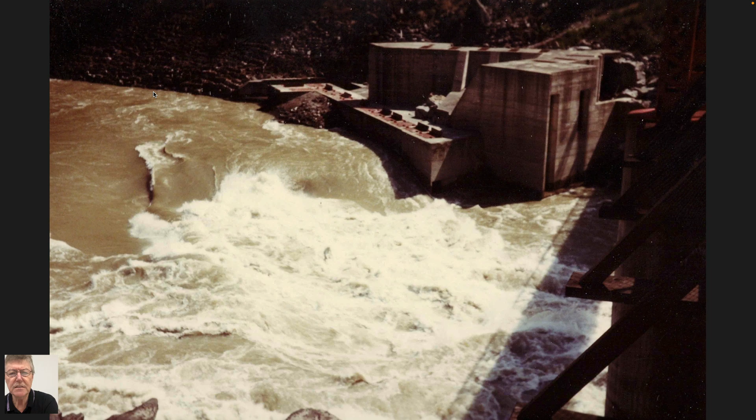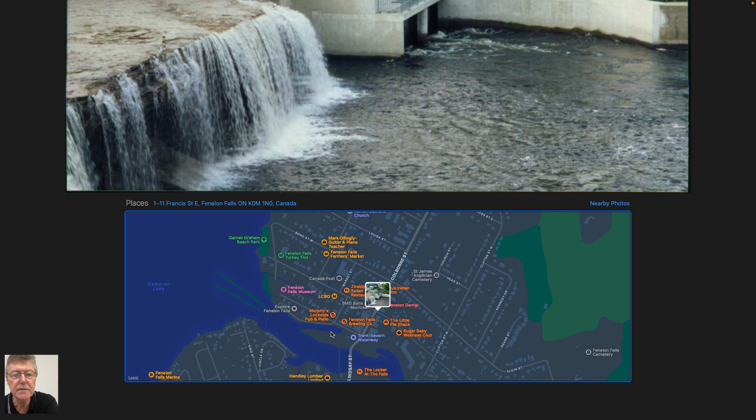And not without controversy. There was a big movement in Iceland that wanted to not go to renewables, specifically hydro, probably in the 1960s. But the interests of energy, I guess, prevailed.

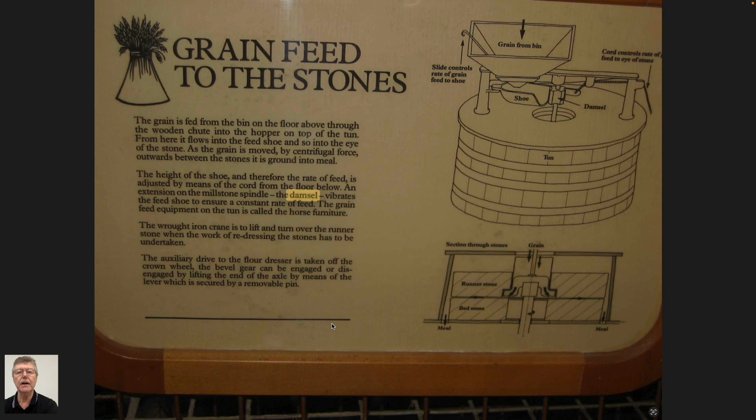Tidal dam in the UK. Tide comes in, you capture it behind a barrage. Tide goes out, you let it flow through the barrage, and you do that with each tide every 6 hours. This is probably from the 1700s, and you use it to grind grain.

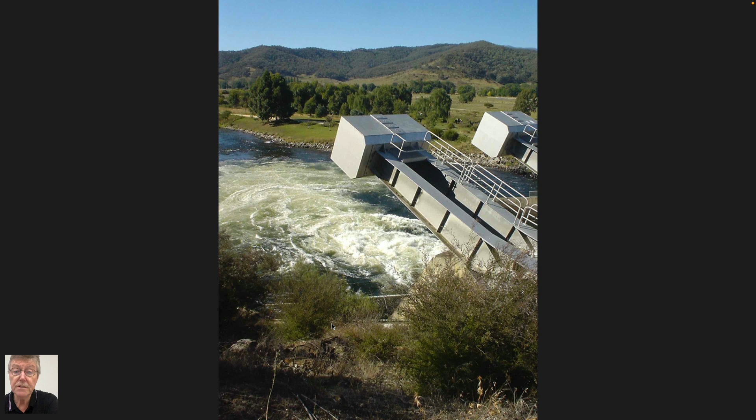You'll be lucky as engineers - you'll get to travel on someone else's dime. And when you finally get a real job and aren't paying for someone to talk to you, which will be a landmark, I'm sure, for you all.

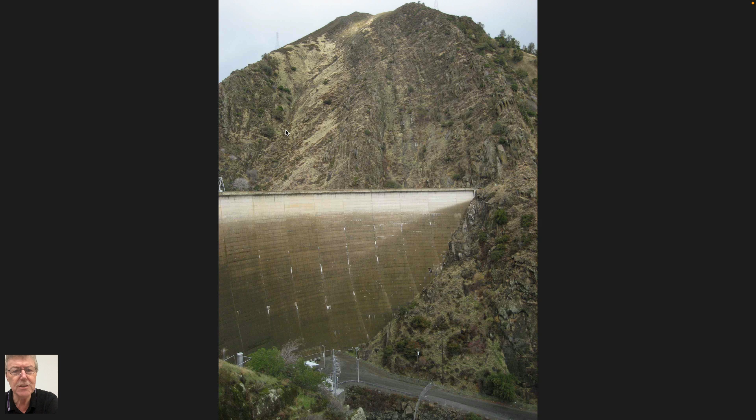Taupo is a volcanic lake. There's a river that goes from Taupo all the way almost to Auckland, called the Waikato. And actually it's basically dammed every single piece of the way. So Arapuni Dam is one of those many dams that takes the catchment that arrives - everything feeds into Lake Taupo and then goes downstream.

And there's even a different watershed here that has a dam on it that they pump the water upstream to get it into Lake Taupo, so they can use all the dams that are already installed - the big capital expenditure on that - without building new infrastructure, by pumping upstream and then using the infrastructure on the dams as they go down. So that's Arapuni Dam.

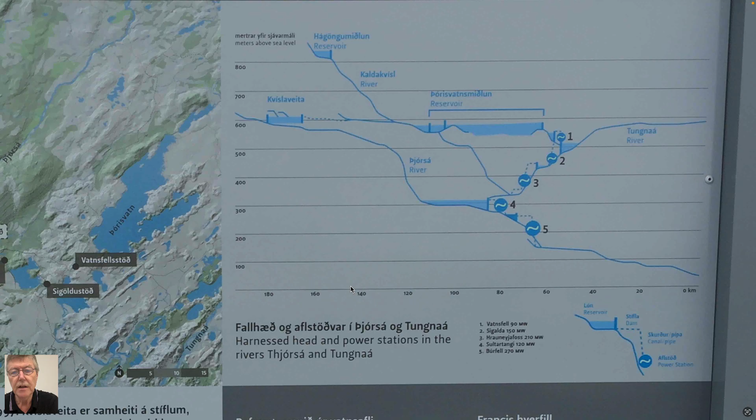In May, a little cool but no snow. I guess that's an interpretive board on how the dams work and how they're linked, and what they look like as they go down from location to location, ultimately to the sea. Landsvirkjun is the company in Iceland.

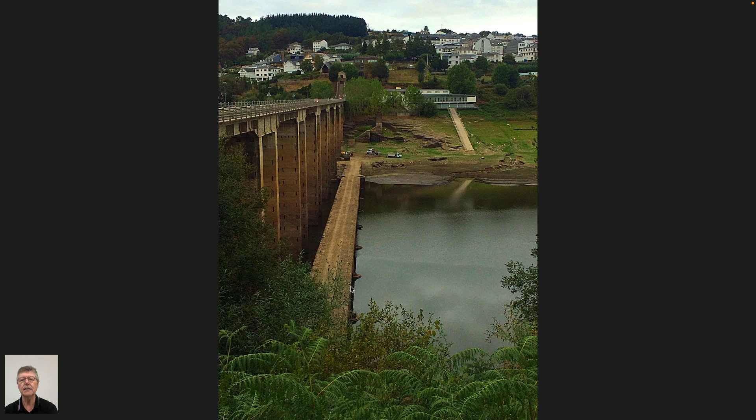The other day I saw that the Youghiogheny Reservoir at the top of the Youghiogheny was down at an all-time low, and the US 40, the national road bridge that had been submerged by the dam and left, was now not submerged anymore.

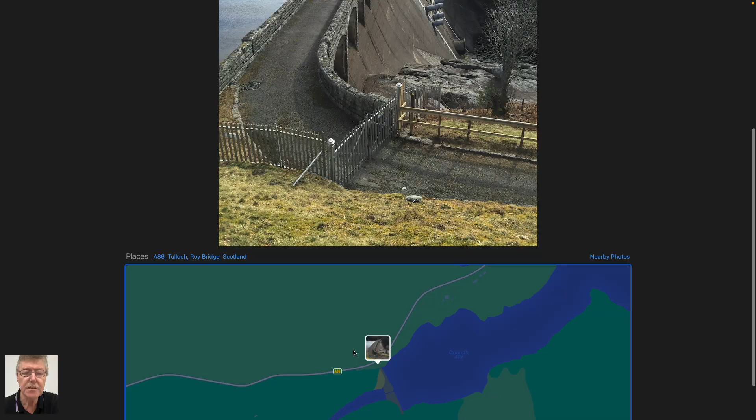I don't know if it's linked to this. It's in western China, just at the edge of the Himalayas. The Himalayas are the water tower of the world, supplying the world with all the water. The Brahmaputra and the Ganges go out through India. The Yellow River and the Yangtze go out through China. The Mekong goes out through Vietnam, I guess. All huge rivers draining the western Himalayas.

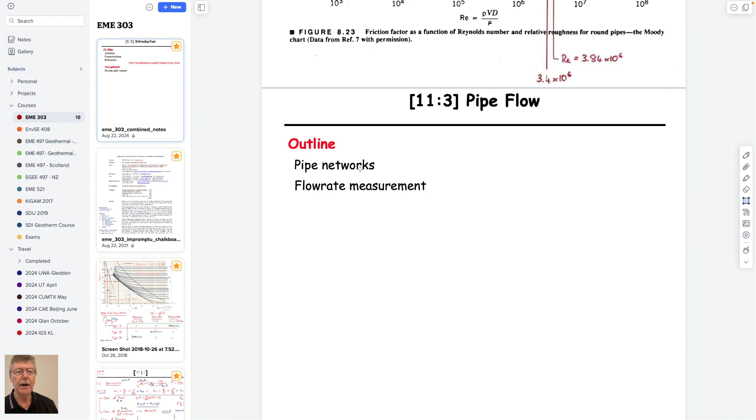So that's it. So that's dams for you. And so it does relate, I think, to what we've been talking about. What we'll do today is talk about pipe networks. I guess it's the final part of our pipe quest.

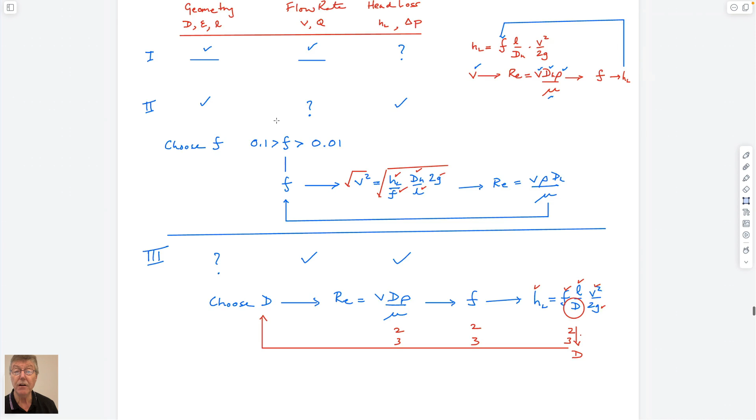Maybe in terms of recap, it's useful just to say what we've done so far. This kind of summarizes it quite nicely. We talked about the methods by which we can solve for head losses in systems. And we talked about these type 1, 2, or 3 problems, and they are based on what you know about the system, and what you want to know.

If you want to know what the head loss is, and you know flow rate and the dimensions, easiest one, because you have a velocity, you can immediately calculate from the dimensions of the problem the Reynolds number, so you know what flow regime you are. Directly you can get friction factor, and therefore you know head loss just from this expression. One-stop shopping, and no iteration needed.

If you want to be able to calculate velocity, it becomes a bit more challenging because you can't immediately calculate Reynolds number. So you have to select a friction factor. We know the rough ranges of friction factors are between a tenth and a 100th. Practically goes to 1,000th actually for some of them. But we have a range for these. We know that they're different for laminar or turbulent, so you could make an educated guess about that if you knew something about roughness. But if you don't, then you just have to choose a friction factor.

You can calculate a velocity from this expression here. This expression rearranged is just this, square rooted on both sides, so you can get a velocity. If you can get a velocity, you can get a Reynolds number. If you get a Reynolds number, you can check the friction factor from our Moody chart. And so you're always on this. This is an Euler number, which is also equal to a friction factor. This is a Reynolds number. And we know we have these 2 regimes. One where the friction factor varies with Reynolds number.

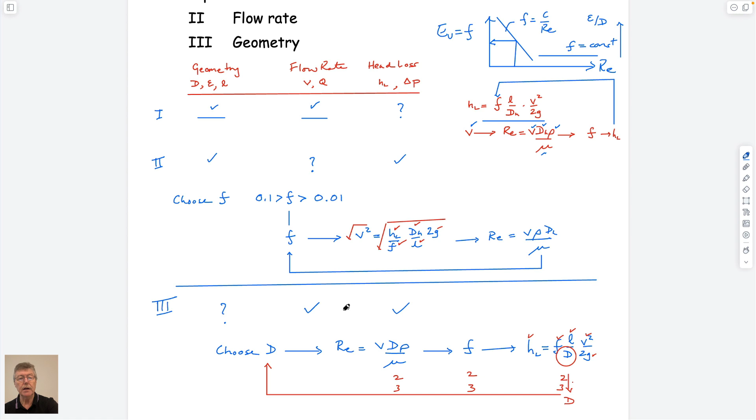So that's type 2, and type 3 is where you want to choose the dimensions. You know you want to get a flow rate of X liters a minute to your bathroom. You want to know what pipe size you should use to do that, and so you need to do the same process. You don't know the velocity. I guess in type 2 and type 3, you don't know the velocities. Actually you do know the velocity in this case, because you have a flow rate. And so you want to calculate the dimensions.

So you choose the dimensions. You've chosen a velocity at which you supply X liters a second to your toilet. And so you get a Reynolds number. Reynolds number gives you friction factor from this. Friction factor gives you, for a given head loss in our system.

Head loss would be, in the UK, lots of people used to have a header tank in their attic. So the water would be pumped into that, and it would just rest there, and that would be the motive force through the system. In State College, you see some water towers placed in the system. Same idea. If you get water from a well, then typically you have an expansion tank which has a bladder in it, which is pressurized, so it provides constant pressure to the water that comes into your house. So you know the pressure that's being applied. You know everything else in this, so you can get the diameter.

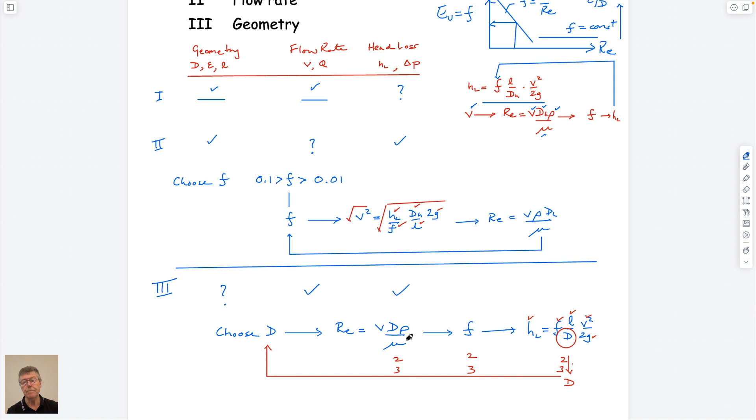You choose a diameter. You calculate a diameter from this. You check it again to see if it's the same diameter you chose. If it's not, you calculate a new friction factor. New diameter gives you a new velocity because you know perhaps the flow rate, not the velocity, and you go through the system again multiple times. So that's what we did last time. So not so exciting, I don't think, in terms of pipe flow, but probably bread and butter work for what people do in terms of calculating these things.

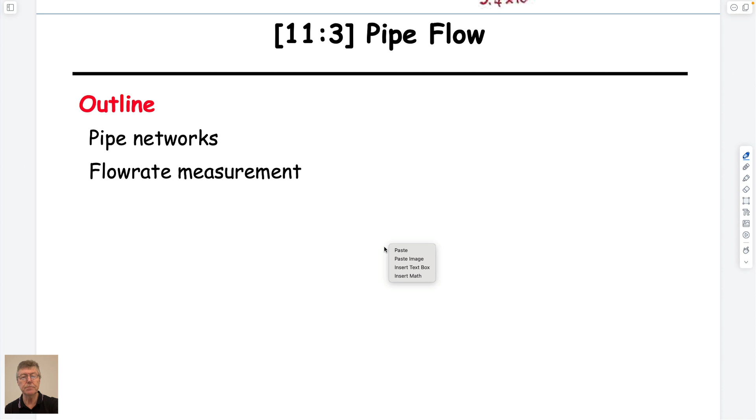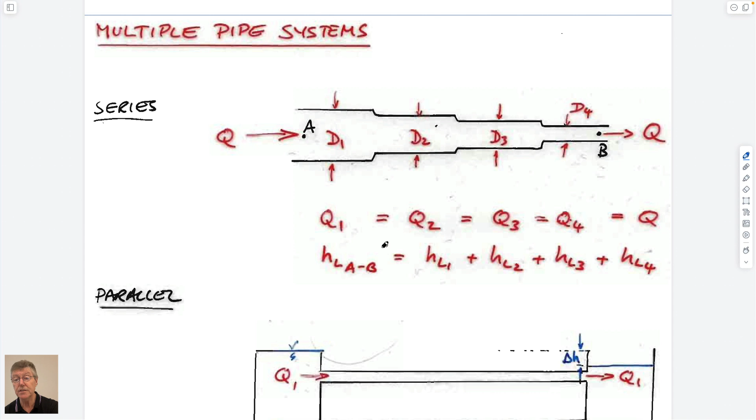So we have a couple of things left to talk about: pipe networks and flow rate measurement. And so pipe networks are where we have multiple pipes, which we'll spend most of our time on. I don't know whether to use our notes or whether to draw it out. I'm not sure what leaves the most lasting impression. It's written down here. But the idea is that we can have flows in either parallel or series. And whether we have flow in parallel or series defines how we deal with it.

So what we'll do is we'll look at these simple geometries, a branching geometry, and then we'll do a couple of examples, and then we'll look at methods of being able to measure flow rates. So the idea, we know from what we've talked about, continuity requires that if we cut this either upstream or downstream, then V1A1 has to equal V2A2. And so those are also equal to Q, right, by definition.

And so we know that when we go through this pipe network in series, the volumetric flow rates or mass flow rates, if we choose to multiply it through by density on both sides, have to be equivalent. And so that means that this is a requirement. But we know also that the head loss is going to be equal to friction factor length over diameter times V squared over 2G.

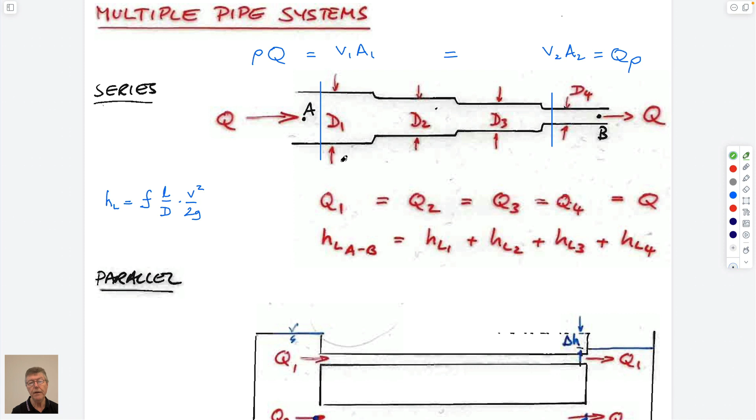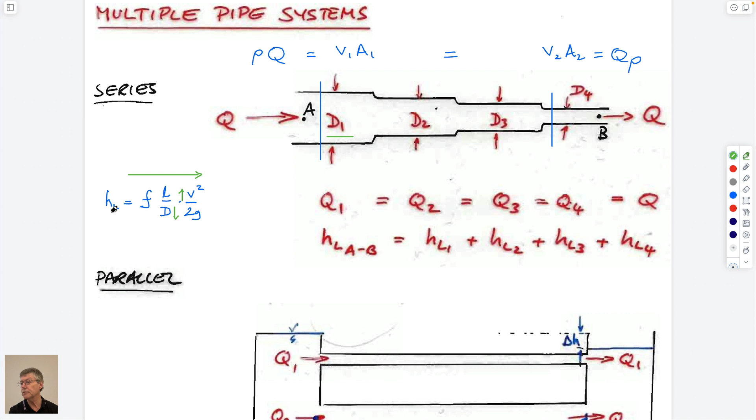And so if we think about what the head losses would be on section 1, as we go to section 4, then we know that the diameter is reducing as we go downstream, so that's getting smaller. And we know that the velocity, because the diameter is reducing, has to be increasing as we go downstream. I'll just use an arrow to represent that. I'm good at pictorial representations. Since this increases and this decreases and it's in the denominator, then the head loss has to increase as we go downstream.

And so if we draw it, say, from upstream to downstream, I'm going to draw this. This is going to be my attempt to represent this system. It's probably worthwhile drawing this. So we have an upstream head. We have a downstream head. And this would be delta Z. And we can either take a point here and here, or we can take a point here and here. We get exactly the same results because these are stagnant tanks, and this would just be a static head of water.

So if we look at our energy equation, we get something like Z1 minus Z2 plus P1 minus P2 over unit weight, I'm just moving the terms from the right-hand side, plus V1 squared over 2G minus V2 squared over 2G, plus HP equals HL. If there's no pump in the system, which there isn't in this particular case, then we ignore this. And so we can write Bernoulli up here at the top, which is easiest, so it's just delta Z. Pressures are 0 at this place. Velocity, big tank expression, so everything drops out.

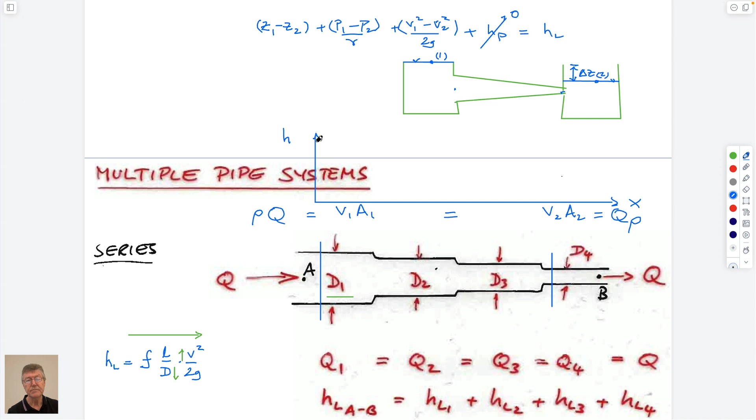If you want to write it upstream and downstream, actually it's not so convenient here, because the velocities don't match up as you go downstream, so let's not do that. Let's just write it at points 1 and 2. And if we do that, then head loss is equal to this. So the head loss over this whole system has to equal this amount, and I didn't leave myself much space. So you could think about the head loss going from upstream to downstream. This is just the x direction. This is the head. And the head loss will look like this, you'd expect, on a pipe that doesn't converge. But we know that it has to be these magnitudes. The total head loss has to sum to that.

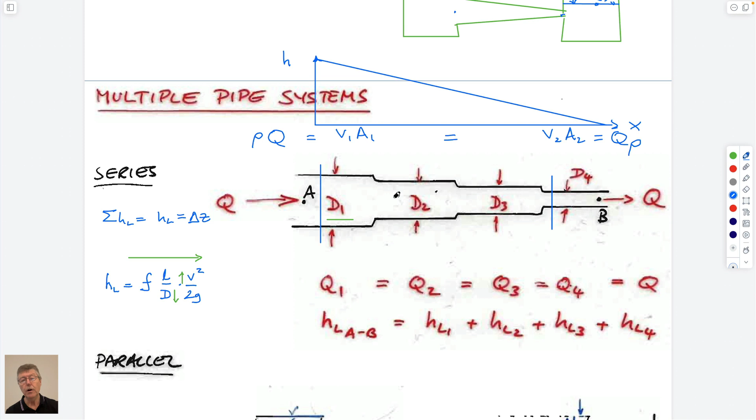Right? We go from upstream to downstream. It makes sense that they must sum to the same magnitude over the top. So we sum them from place to place. The utility of doing this is that this shows that as we get a smaller pipe, the overall head loss must increase. And so if we were to look at what this might look like schematically as we went from upstream to downstream,

then we know that the head loss as we go downstream has to, don't do a straight line, either look concave downwards or concave upwards, right? Because it has to end up at this total amount as we go across it. And we know that we get less head loss upstream, and so we could rationalize that it's actually going to look like this.

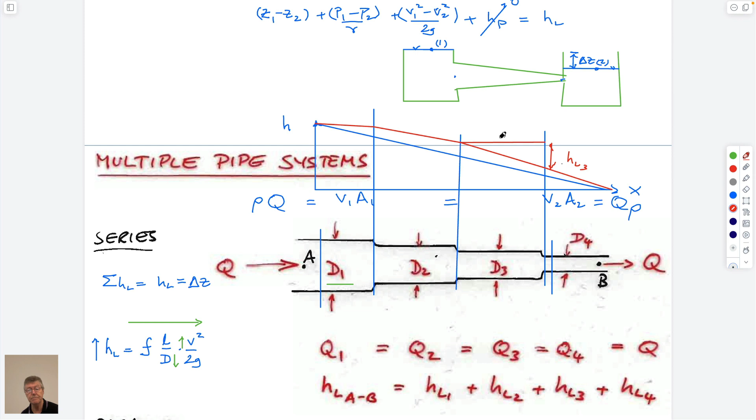If these pipes were all individually the same length, then this is a small head loss between upstream and there, bigger head loss. So the head loss incrementally would be this amount here. This would be HL3, etc., and the others. So we can rationalize that. And so if we know what the flow rate is, we can calculate the individual components and calculate the head

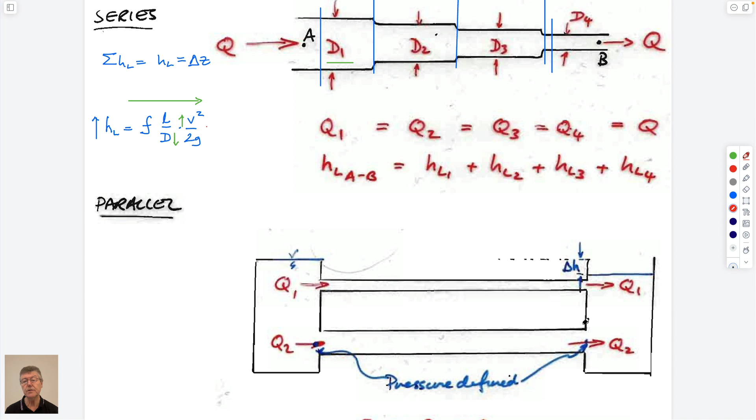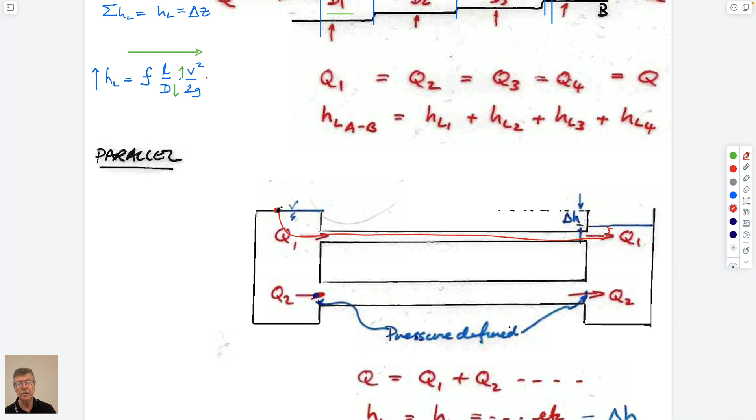loss over the system. If we have a system that looks like this, here we've drawn the big tanks upstream and downstream. We know that this also is going to be the same head loss between; we can either draw a circuit through this going along here, or we can also draw a circuit through this and going up here. And we know Bernoulli through those would be the same things. So the head loss for circuit 1 and the head loss through circuit 2 have to be the same because it's exactly the same end conditions here.

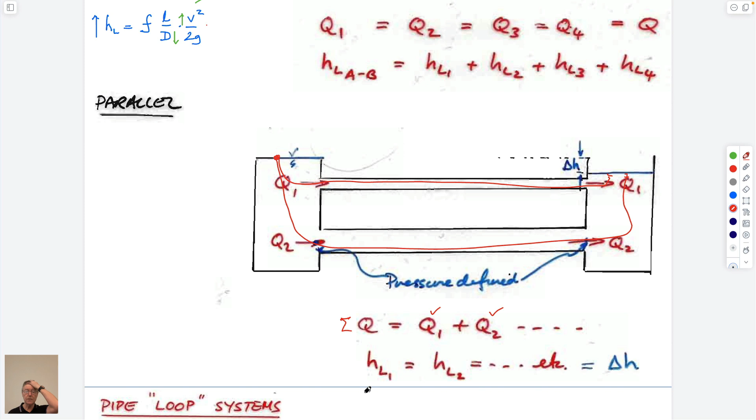And so we know that the head losses through the system are identical for each of those flow systems, but we get Q1 coming out and Q2 coming out, so the total flow through the system is just going to be sum of Q. So those are the conditions for pipe networks. So that makes system sense as well, right? If we look at more complicated systems, then we can do exactly what we've done before. So it makes a difference whether it's in series or parallel.

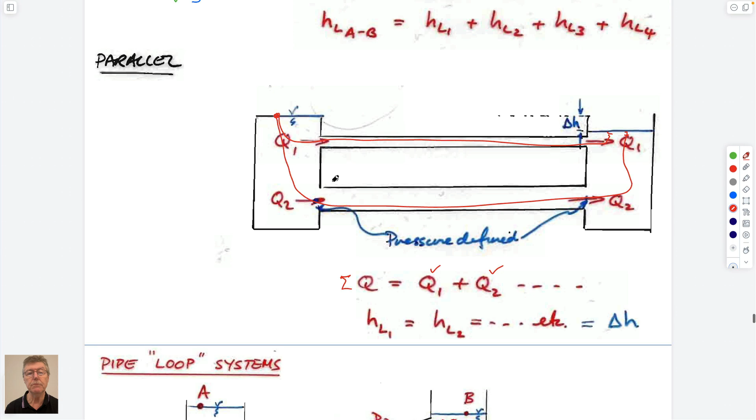I suppose for many of these hydro systems, this would be exactly what those 4 or 5 pipes going downhill in Tasmania would be. They're parallel pipes. The head losses across the systems would be the same. And of course, within this system, we'd want to have turbines. We'd be able to match the upstream flow rate with the downstream, well, calculate the flow rate. And I guess the other interesting thing that we could do would be that if we go back to this expression here,

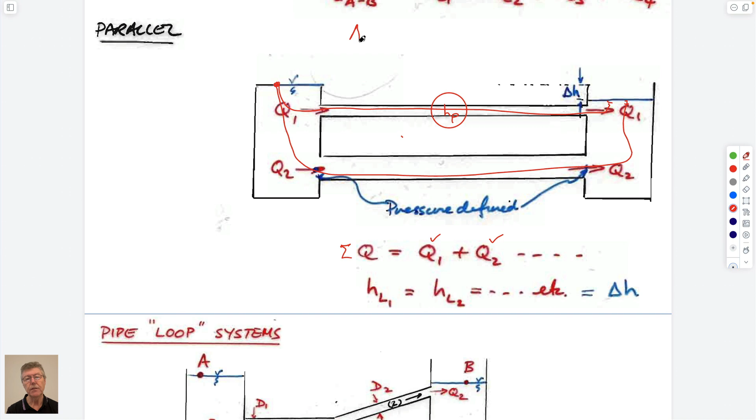and we write that delta Z plus HP equals HL. If we know that HP is equal to power, big W dot, over rho G times volumetric flow rate. And so we can rewrite that as we have actually already. Let's assume that this is 0, no head losses in our system, just to make life easier. So HP equals delta Z, negative, I guess, if we want to be consistent. And so in other words, if we write that out, this would be equal to delta Z.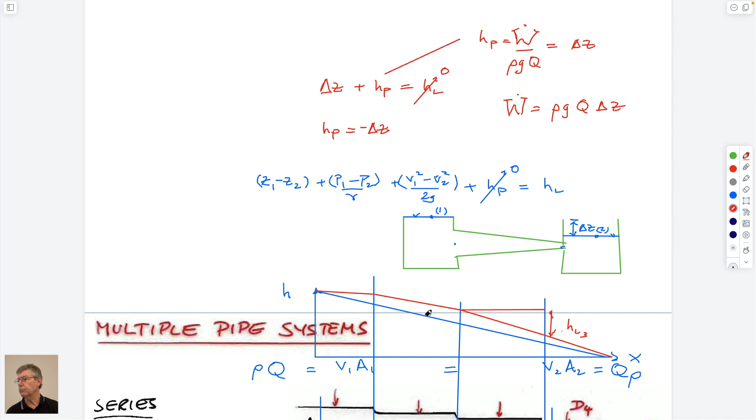So in other words, very straightforwardly, we get that the power from a dam is equal to the density times gravity times the volumetric flow rate times the head drop. Simple. No losses in the pipes. We want to have big diameter pipes because we know big diameter pipes have the smallest losses. Big diameters, smallest head loss. So that will guarantee that this goes to a small number. And so this is just equal to the mass flow rate and delta Z.

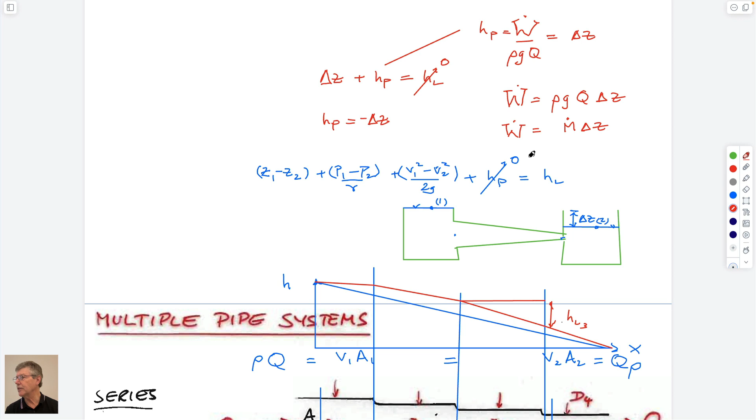So the mass flow rate is controlled by how much rain you get, and you don't make dams in the Netherlands to generate power because there's no elevation. You need elevation gain to do it. That's why Norway has so many, and that's why they want to become the battery of Europe. I'm not sure they use that term, but that's essentially what they want to do. And so that's a useful number. You can also calculate the maximum power out of a wind turbine as well, just by using these same things. Perhaps we'll do that next time when we talk about external flows.

But I digress. So loop systems, a bit more complicated. You can imagine that you can write Bernoulli exactly the way we did previously, and you could write it on a circuit that goes from A to B, but goes through pipes 1 and 2. And if you do that, then you'd end up with the upstream tank conditions here in A. You'd end up with the downstream tank conditions here in B, big tank assumption. And you'd end up with head losses in pipe 1 and pipe 2. So you'd end up with this equation if you take the top circuit that goes out through this.

If you take the bottom circuit that starts off here, goes part of the same way, but then digresses to come here, then you end up with, again, the upstream tank, the downstream tank, and the head losses on the first circuit and the second circuit.

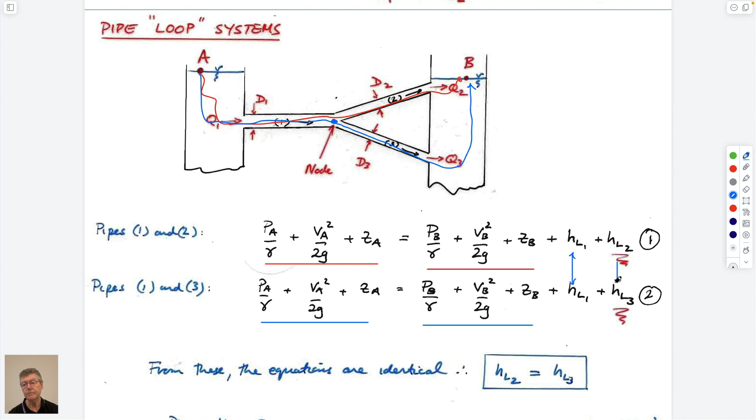These obviously, since you end up with the same head at this point here, the drop between here and here has to be the same. Head is going to be the sum of pressure, elevation, and velocity at this point. They have to be the same at this exact point. And so this means that since these two expressions have to be the same, these have to be equivalent to each other. So the head losses on this final section, if you were to draw them out, I'm not sure if I have enough space to do that.

I guess you could draw this as the elevation Z up here, and you could draw this as the elevation Z here. You know that when you go through this system, it has to look like this. This is the head loss in pipe 1, which physically would be this amount here. And conveniently, the head loss in pipe 2 and in pipe 3 would be this. And it has to be this because they end up in the same tank. So you can use that to be able to solve it.

And so for all of these systems, if you look at the very big picture, to solve it, and we'll solve a couple of them, we have maybe 3 variables. We have V1, V2, and V3. And we know that these will turn up in these components here, right? Head loss is equal to friction factor, length over diameter times v squared over 2g. Maybe we know the dimensions of these pipes, so we'd know L. Maybe we can guess the friction factors, but we probably want to know what the velocities are. So if we don't know those velocities, we have three unknowns, and we need three equations to solve them.

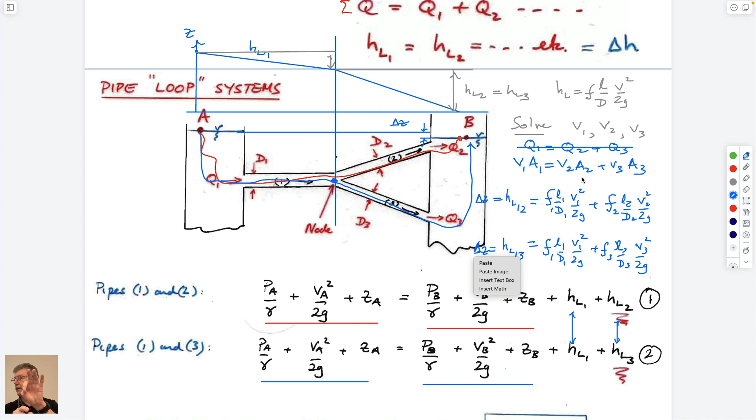And so we have three equations, three unknowns, and the tricky part is just solving for them. It's tricky because sometimes there are v squared terms, so you end up with quadratics and cubics like we did last time. Nasty equations. But understanding the basic principle of how we do it, quite simple. Three unknowns are three velocities. We need three equations to close the system. We get two equations from the energy equation through two different circuits, and one from continuity. It's exactly the same as when we solved the Navier-Stokes equations to get the distribution of pressures across a pipe. Those are differential equations, but the same idea. You have to have enough equations to solve for your unknowns. Okay?

Well, let's not go into the excruciating detail that we did on our type 3 questions last time. I noticed some people busy doing homework in the front last time. So let's not do that again. But let's just go through the gist of it.

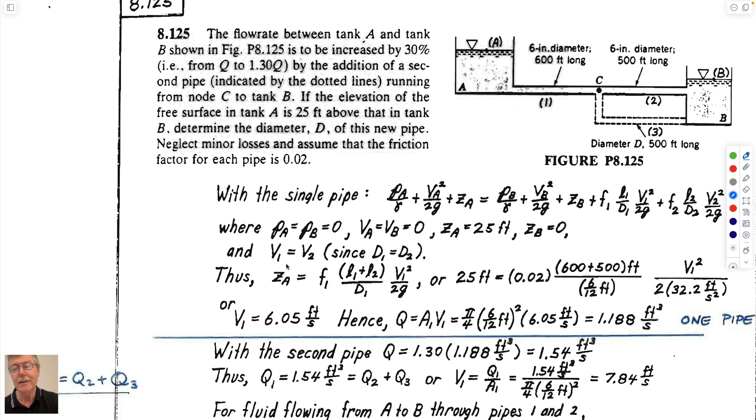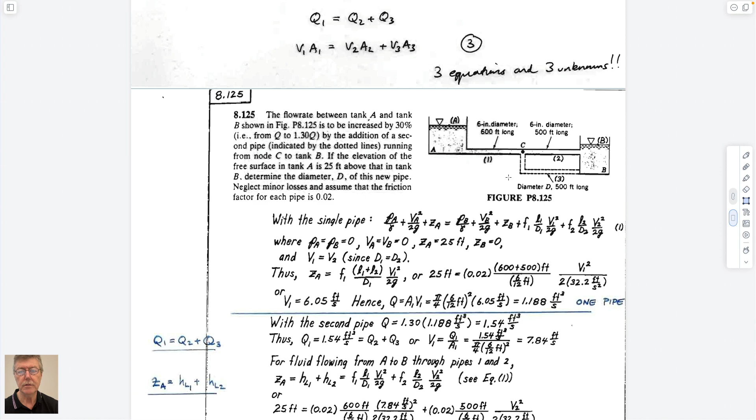Actually, it might be. I was tempted to think about doing this. Does it copy it? I think that's not the way it copies. Oh, it does. I will sound so surprised when I actually do something right. Story of my life. Okay.

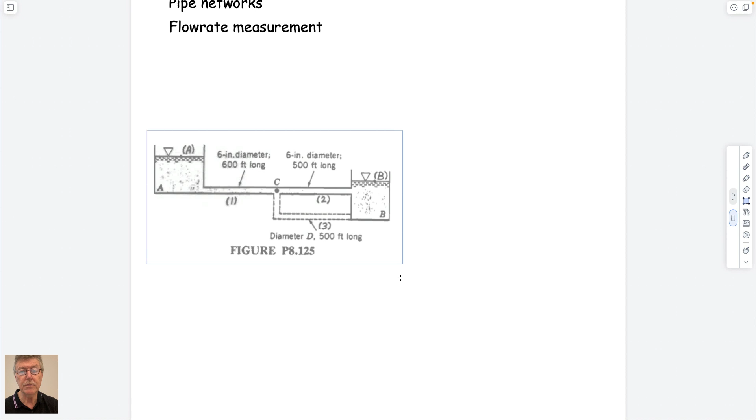So instead of going through, maybe we'll go through the example also, but just state what the question is. Question's pretty straightforward.

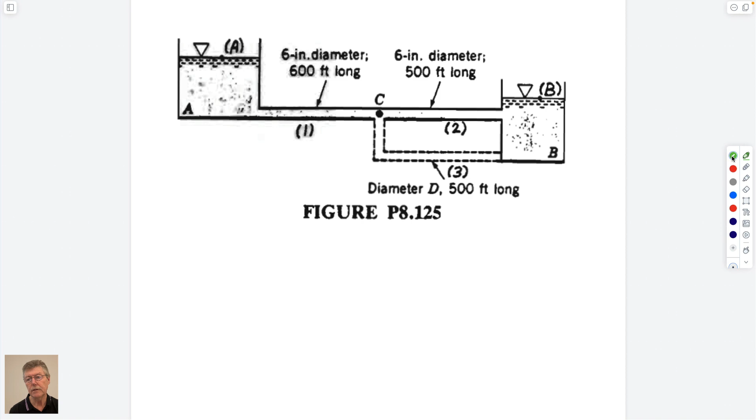Flow rate (1 plus 2) is unknown. I should state the problem. So the idea here is 2 tanks. They're joined by a pipe. This pipe is not there yet. There's a flow between the 2 tanks, which you don't know, but you know what the head difference is. Calculate the flow rate between the 2 tanks without this pipe, and then calculate the diameter of the pipe you need to add so that you increase the flow by 30%. That's the question. And so how would you solve that problem?

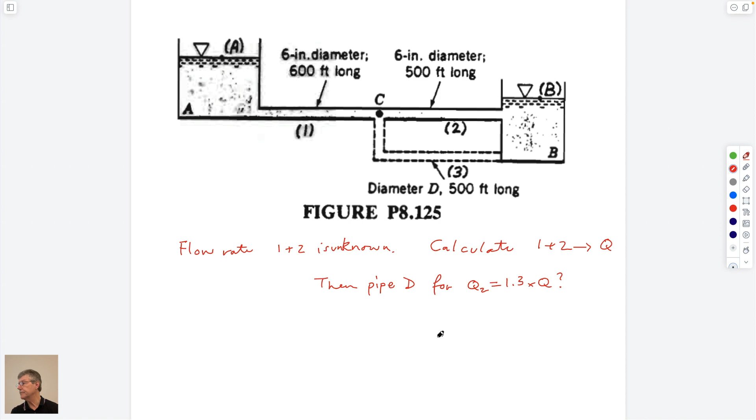Is unknown. Calculate. So calculate circuit 1 plus 2. Then pipe diameter. It's actually quite long if you write it out, isn't it? Then pipe D for, so this gives you Q, pipe diameter for Q2 equals 1.3 times Q. 2 parts of the question. That's the question. So how would you solve it?

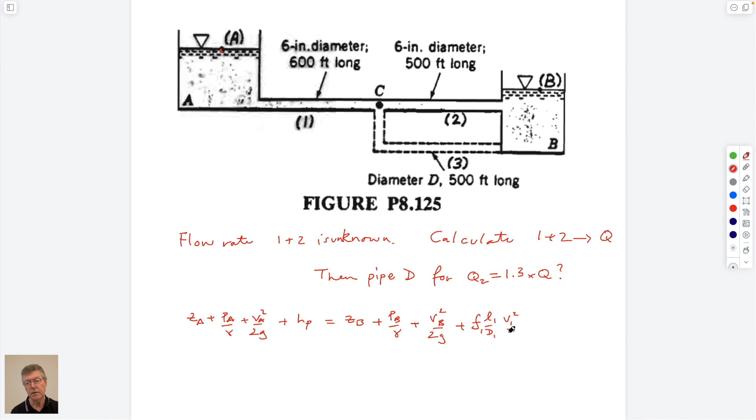You want to know the flow through the system. What do you know? You take Bernoulli and you'd write it to these points. You'd get ZA plus PA over gamma plus VA squared over 2G equals, no pump, equals PB over gamma plus VB squared over 2G plus friction factor pipe 1, L1, D1, V1 squared over 2G plus friction factor length over diameter for 2, V2 squared over 2G.

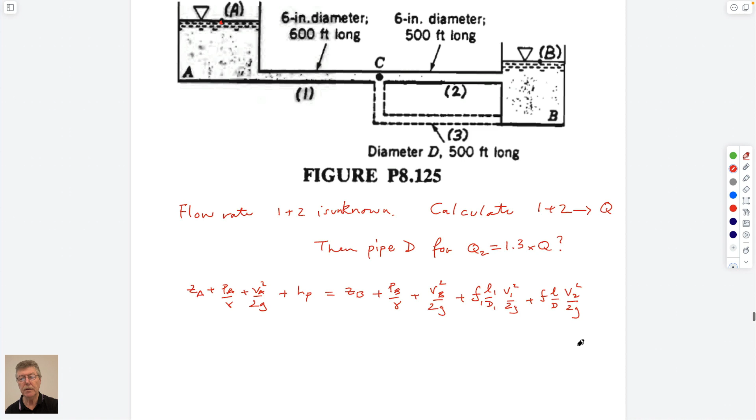When I rush, my handwriting gets even worse, right?

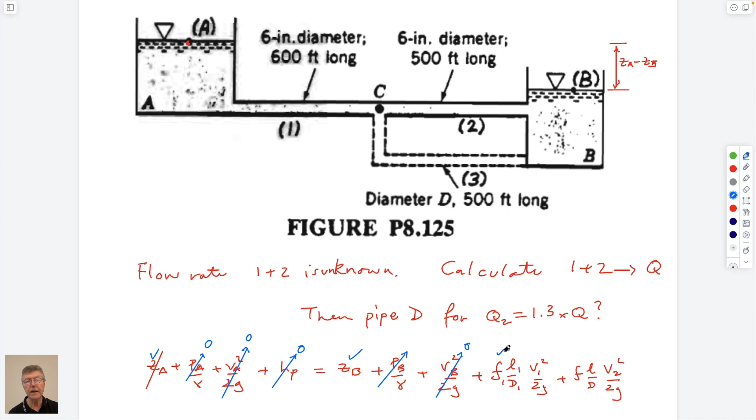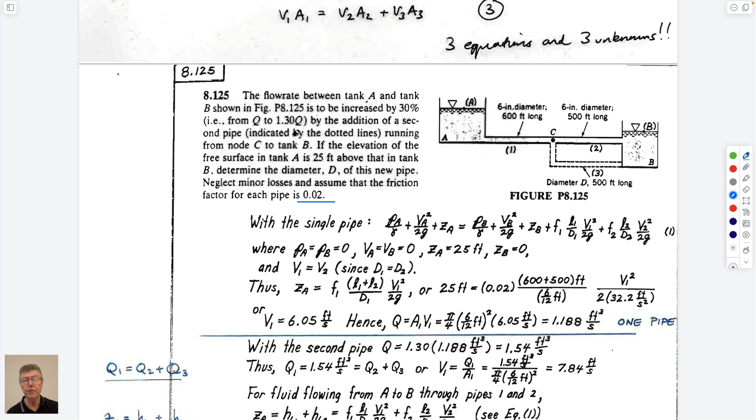So what do we know? We know this is ZA minus ZB. So we know this, we know this, we know there's no pump, we know it's a big tank, so this actually is 0. We know it's a big tank, so this is 0, and we're taking the pressures on the surface, so we know that these are 0. So we're given a friction factor, so we would know the friction factors for both of these, pretty sure. So we know the friction factor. We don't know the flow rate, but we want to increase it to 1.3. We know the diameters of the pipe, so we can basically solve that.

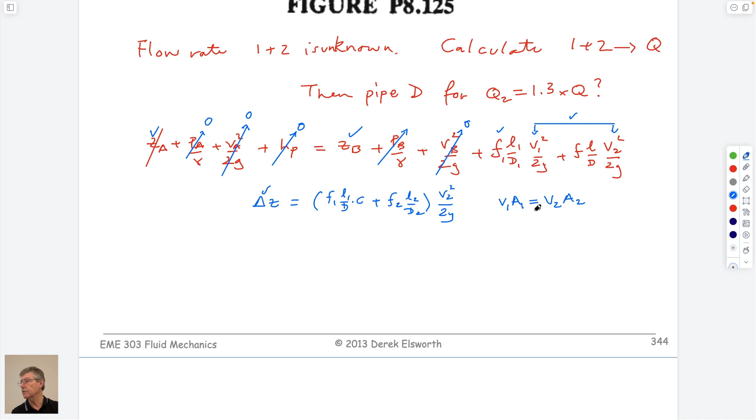So we have one expression. We know that these are equal to each other. We know that V1A1 equals V2A2. So these two are linked. So we have delta Z equals some terms F1, L1, D1 times another term, a constant to account for this mismatch, plus F2, L2, D2 times V2 squared over 2G, right? So we know what this is, so we can solve for this, because we know what C is, controlled by the ratio of these things, just not doing the substitution.

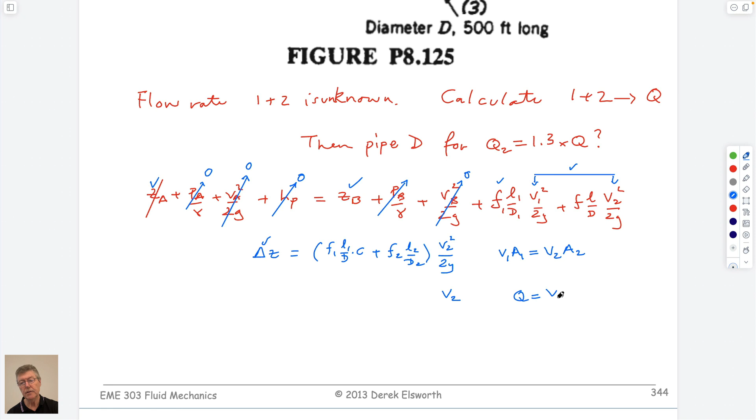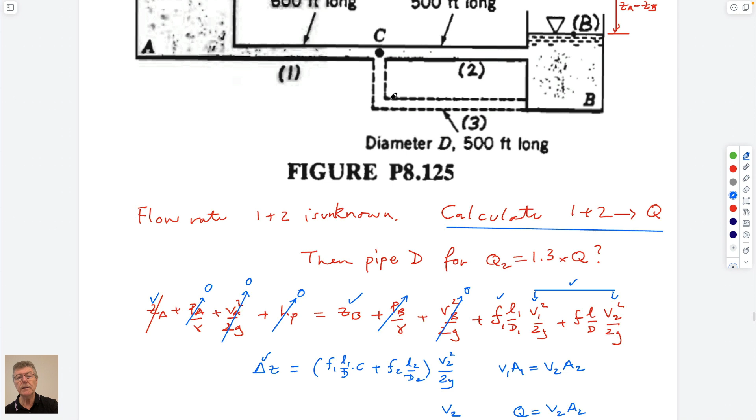So then we can come back and we can write two circuits. So this will give us V2, and Q is equal to V2 A2. That's it. So long and drawn out, but that's the first part. We've calculated the flow rate through the system. We want to know the flow rate through the rest of it. So now we know that we want Q to equal 1.3 times Q0.

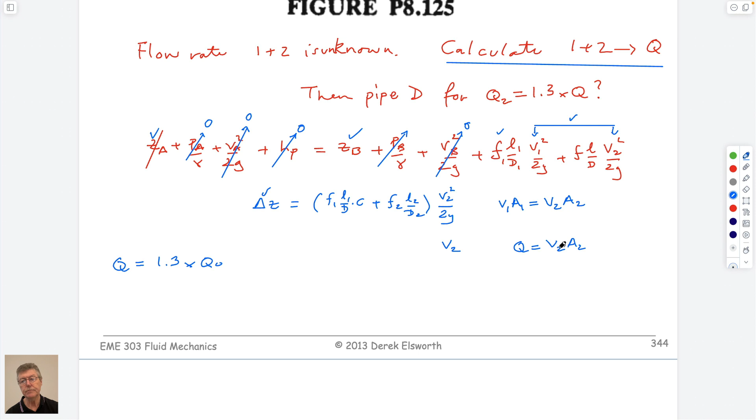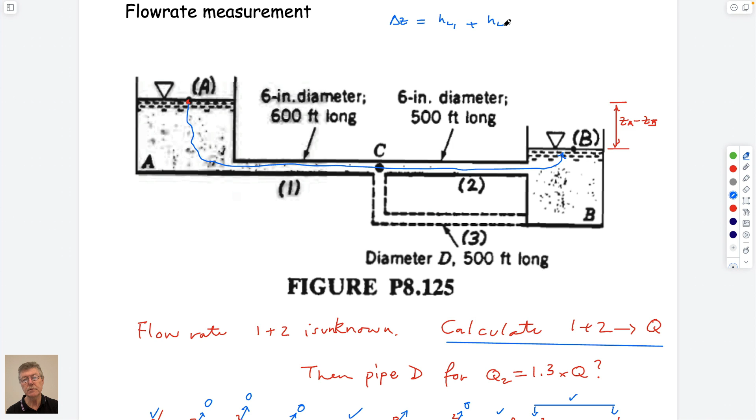So we now need to rewrite this. So we can go through this and we can write two circuits. We can write one circuit, is this. We know that the equation is just going to be delta Z equals, for the top circuit, head loss 1 plus head loss 2, right? These two pipes. We know that each of these head losses are going to be something like friction factor, which we know, L1 over D1 V1 squared over 2G, etc. for each of these.

And we're going to write a circuit through here, which is going to be same head loss across the system, equals head loss 1 plus head loss 3. And this one is going to be HL3 is equal to friction factor length over diameter pipe 3 times V3 squared over 2G. And so we certainly don't know what the flow is through here. And so the way we can constrain these equations, I suppose, is that V1 A1 is equal to V2 A2 plus V3 A3. And so really we do have three equations and we have to know what the unknowns would be.

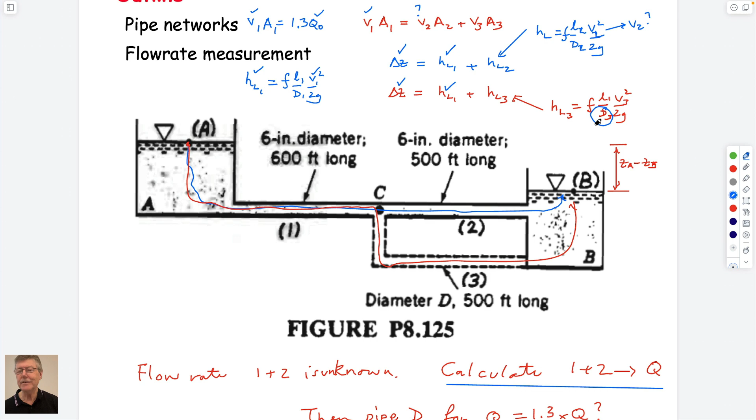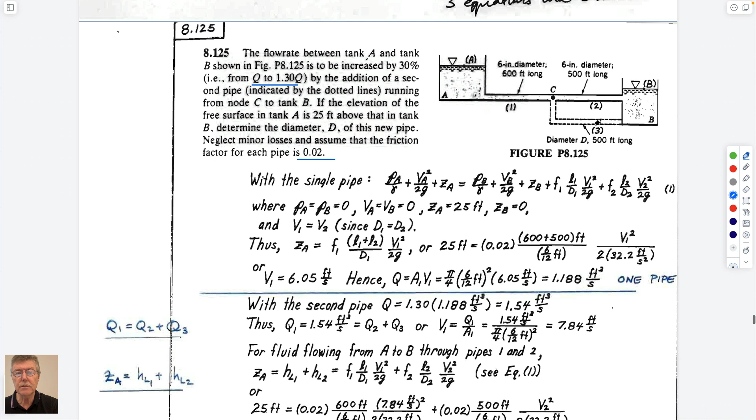I don't know if that was any clearer than going through the numerical example. The numerical example actually lays it out okay. So without going excruciatingly through the example, let's just explore those parts.

We want to know how much water is flowing through the pipe when this one is shut off. So we just have an upstream and downstream, a composite pipe with a friction factor upstream and a friction factor downstream. We can write the energy equation as this, and it comes out to elevation drop equals the friction factor of those two pipes. They happen to be the same diameter, so they'll have exactly the same friction factor. So we have one equation here that we can solve for V1.

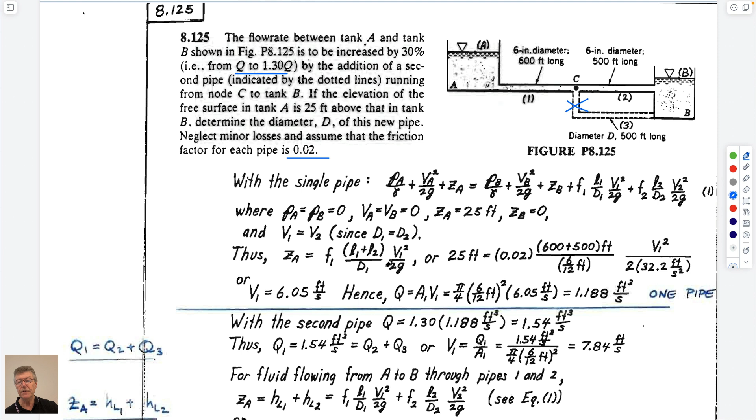We didn't need to apply continuity, actually, so I didn't notice that. Since the diameters are the same, the velocities in each are the same, so V squared is the same, and we end up with a velocity. From the velocity we calculate a flow rate, and we have that. We know the flow rate we want is 1.3 times that, so we have that.

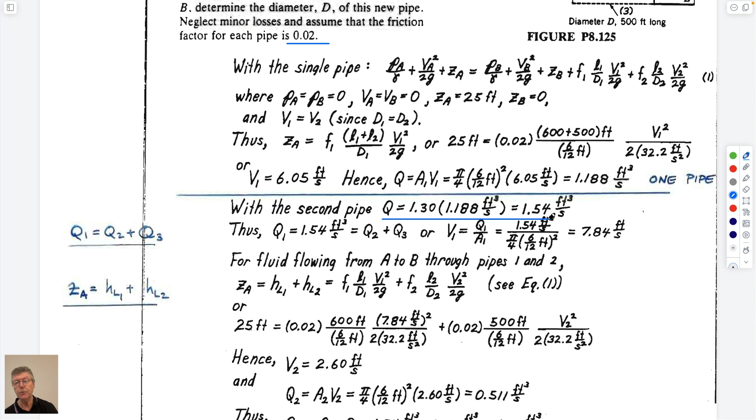Now that we're putting this circuit in and opening up this pipe, we can write the equations through here and through here. We also know the volumetric flow rate Q1 has to equal Q2 plus Q3. In doing that, we merely do this, so we can enforce that the upstream volumetric flow rate is this.

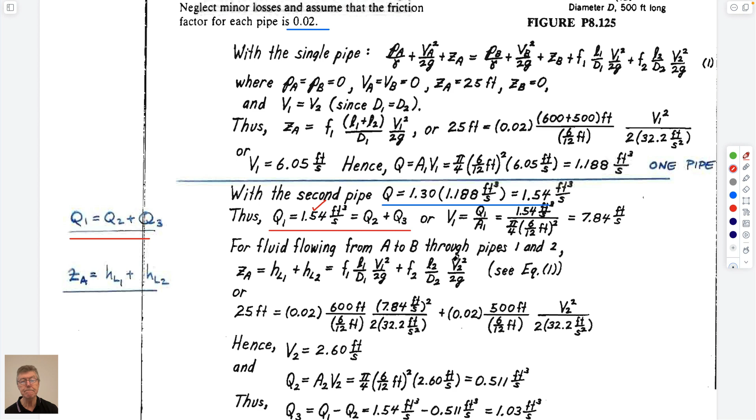We know the upstream flow rate in pipe 1 because it's 1.3 times the original amount, so we have that. We know that if we go through the upper circuit through 1 and 2, this is the expression that's going to govern this. This is this here.

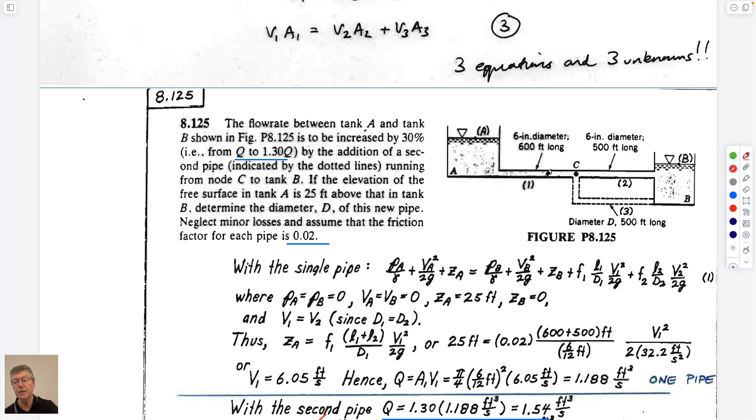We have many of the components we need, but we don't know the velocity in the downstream pipe. We certainly know the upstream velocity, because everything that comes out of the tank, 1.3 times Q, has to be the velocity going through here. So we definitely know this velocity, and that gives us this expression with only one unknown, V2.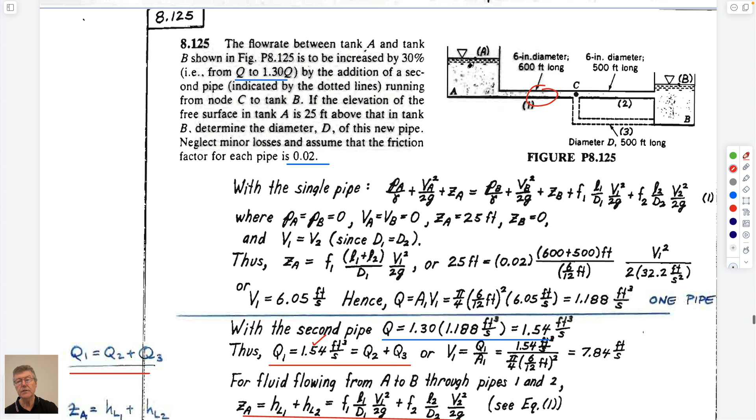Then we can write our way through the second circuit, going through this and coming out here, and this expression is this. Again, the head loss is the same from upstream to downstream, but now we're going through the upstream pipe and the lower pipe we've just added. This is the expression we have.

We know the upstream velocity because we have the flow rate. We know the head loss because of this. We know this as well, because V3 A3 plus V2 A2 is equal to Q1, right? So we know this.

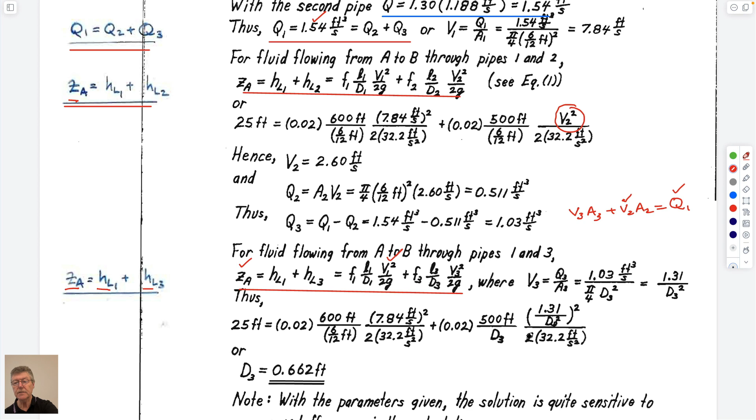If we know this velocity from here, then we can get this, and so we can define this as a function of V3. So V3 and D are still in this equation, they're related, and we can't get them out. If we know the upstream, we end up with this expression where we have both D3 and have solved for the magnitude of V3 as being equal to the volumetric flow rate divided by the area, because we know this.

I guess physically what we know is if we drew this from upstream to downstream, physically what we're doing is getting the head loss, which would be this for the single pipe, but for the double pipe is going to look like this.

Head loss in the upper pipe is the same for both circuits, and the head loss in the lower pipe is the same for both 2 and for 3.

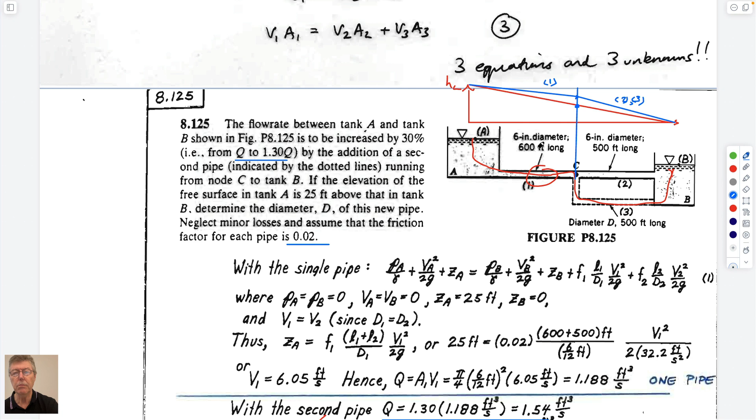And all we're doing is enforcing that boundary condition as we come down. Notably, the head loss at this point is not the same for just one circuit as it is for two circuits. So that's the crux of this problem.

But basically, if you take out all the arithmetic gymnastics, we have three unknowns. We're solving with continuity, and the known head loss over the entire system has to equal the sum of the components on the upper circuit. The head loss on the entire system also has to be the sum of the components on the lower circuit. And likely we have velocities 1, 2, and 3, so we close it with three equations.

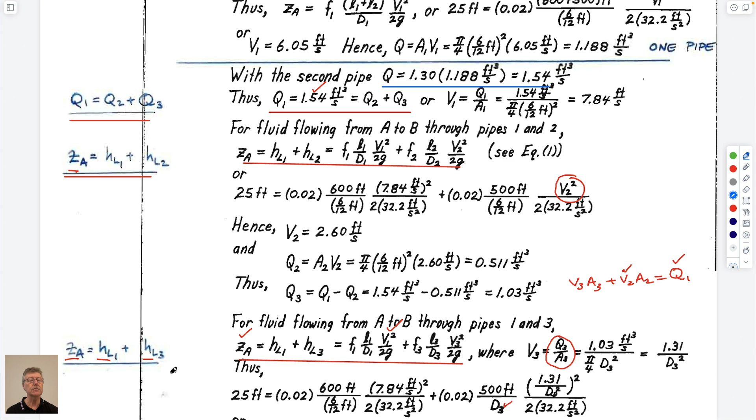Actually, we have velocities, and we have a diameter here instead of a velocity. So we have two velocities and one diameter, which are unknowns we have to solve for. It's just a little different, but that's the basic idea.

This is even more complicated, but the same idea. If you have a circuit where the tanks have two different elevations, then you can't say that the head loss between the tanks is the same for both circuits, because they might be different.

Also, you have to be aware that water will flow from the highest reservoir to the lowest reservoir, so you have to figure out which is the intermediate reservoir, because the upper and the intermediate reservoirs are likely going to be flowing into the lower one. Certainly the lower one is not going to be flowing into the intermediate. So you need to look at what the elevations would be.

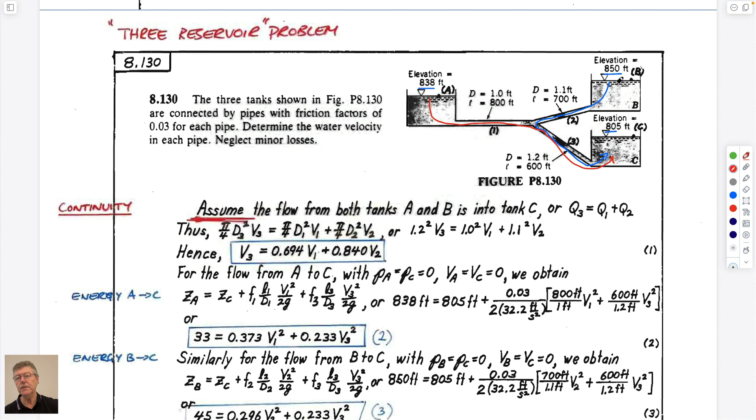838, 850, 805 - so the flows in this are going to be in one circuit here, and in one circuit there. Again, you can write the equations, like in the branching one, from upstream to downstream, either along this course or along this course. But now they don't have the same end delta z. So you just have to account for the fact that the elevation difference between upstream and downstream is different between these two.

And so if you do that, the same thing applies. Continuity is: Q1 plus Q2 equals Q3. Q1 is this circuit, Q2 is this circuit, and they have to equal the one going through here.

And then you write the energy equation for these two circuits. The energy equation: the difference from A to C is from A to C, so it's the difference in elevations. This was our delta Z before, which is between this tank and this tank. And the flow losses along this pipe and this pipe, which are just written here.

And then separately, you can do the blue circuit from B to C. And B to C, well, the difference in elevations of those two - you'd take this to the left-hand side, likely - and it would be the losses along this pipe plus this pipe.

So in big picture, you have: delta Z AC equals HL1 plus HL3. And delta Z BC equals HL2 plus HL3.

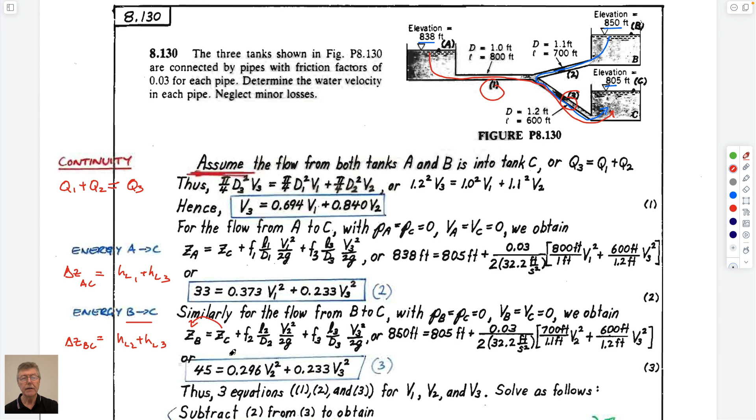Same idea - you have three unknown velocities, you have three equations, and you really do have to do some mental gymnastics to get the answer, which I won't bore you with or embarrass myself in doing either way.

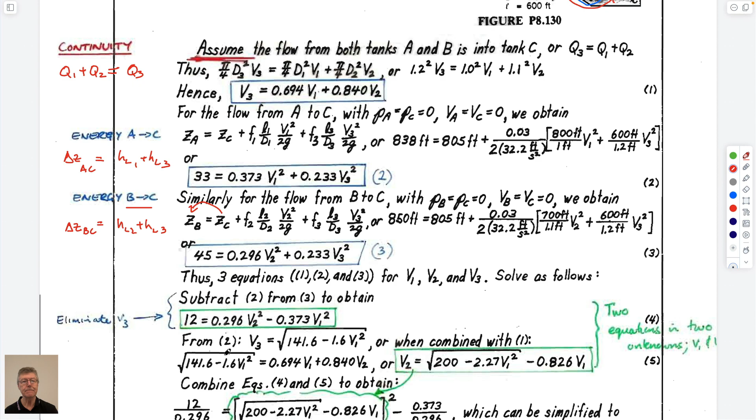So that's it. Right on the witching hour, so we won't talk about flow rate measurements - you probably know these things. We've talked about it. Maybe we'll spend 2 minutes on Monday talking about that. Leave it there. Okay, great. That's all we'll talk about pipe flow.

Really only 2 more weeks of classes. Next week is external flows - flows on wind turbines, on wings, same protocol. We can use the Moody charts, they look slightly different, but they're essentially the same. And then open channel flows, how water flows in rivers and ditches.